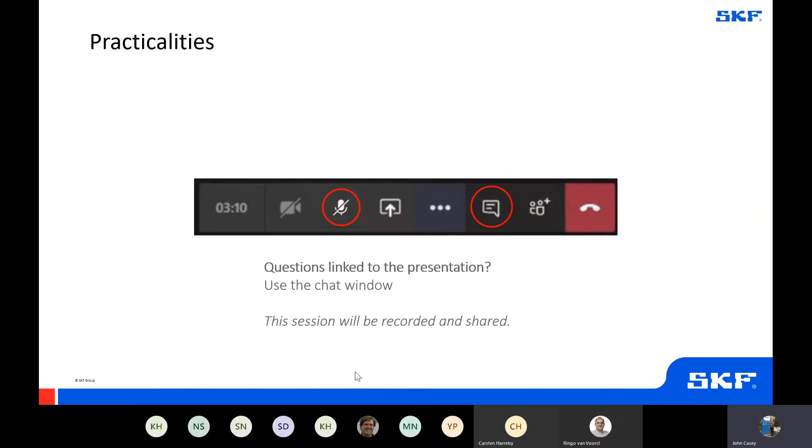SKF's business and strategy is based on a deep understanding of the trends and drivers that impact, or have the potential to impact, all markets, regions and industries in which the group operates. For more information on SKF's regions and industries, you can see our annual report. If we look at where our environmental challenges are, SKF are positioned at the forefront of trying to meet these challenges.

SKF's strategy is the foundation from which the group works towards its vision of a world of reliable rotation, and its mission of becoming the undisputed leader in the bearing business. Sustainability is embedded in SKF's business.

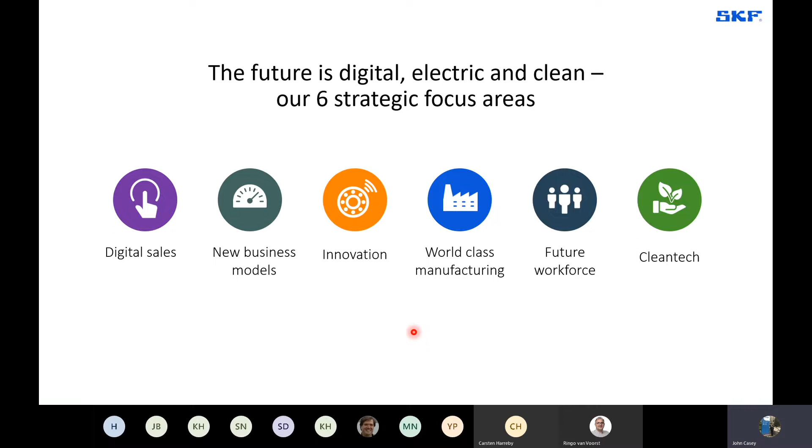Clean technology, in short clean tech, is any process, product or service that reduces negative environmental impacts through significant energy efficiency improvements, sustainable use of resources, or environmental protection activities. So we look at remanufacturing as being part of our strategic focus areas.

In 2019, we would have used 1.7 times more resources from the planet than nature could renew in the whole year. And the development goals are looking for us to change our methods of manufacturing.

For the circular economy, in nature nothing goes to waste. Everything is food for something else. It is called the ecological cycle of life. A technical cycle can be the same. This is called the circular economy.

The core idea is to keep the same materials in the loop and avoid the use of virgin natural resources. There are three principles of the circular economy. These are:

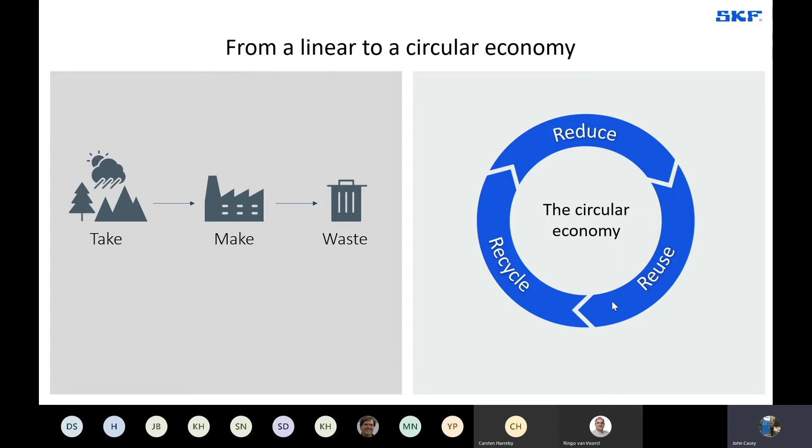One essential benefit of remanufacturing is that already processed material is used for a longer time. For example, a bearing that is normally replaced after 3 years could be remanufactured twice and last up to 9 years, providing the function of 3 new bearings.

The remanufactured bearings and units from SKF function as new and are delivered to customers with the same warranty as new bearings. For the customer, this brings benefits such as reduced lead times, lean operations, and often lower costs.

The remanufactured bearings cut emissions in the production phase by up to 90% compared with a new bearing.

Remanufacturing means rebuilding a product to the specifications of the original product using a combination of reused, repaired, and new parts. Remanufacturing is found in many SKF business models, often in combination with condition monitoring and predictive maintenance, but increasingly also as a standalone product.

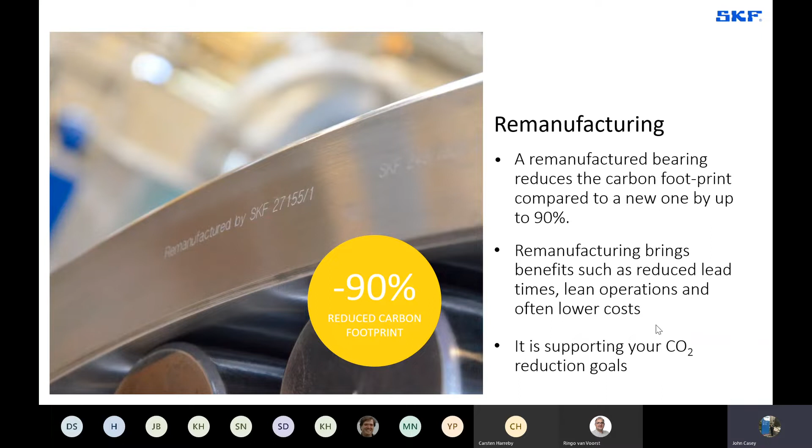As an example, flying Frankfurt to Madrid and back 3.5 times is the same as manufacturing a spherical roller bearing from new, as is eating 33 kilos of beef, or driving a new car 8,400 kilometers.

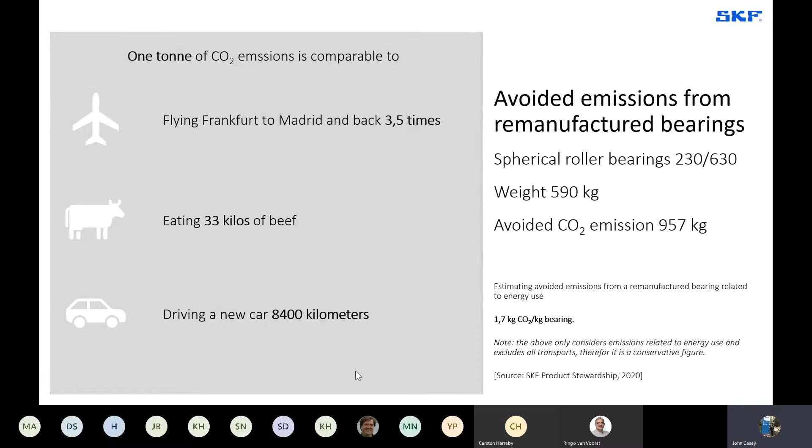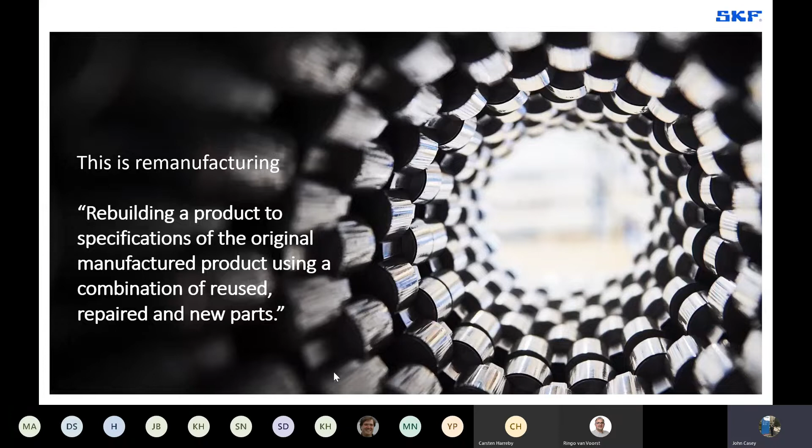As I've said, this is remanufacturing: rebuilding a product to the specifications of the original manufactured product using a combination of reused, repaired and new parts — the important point of remanufacturing.

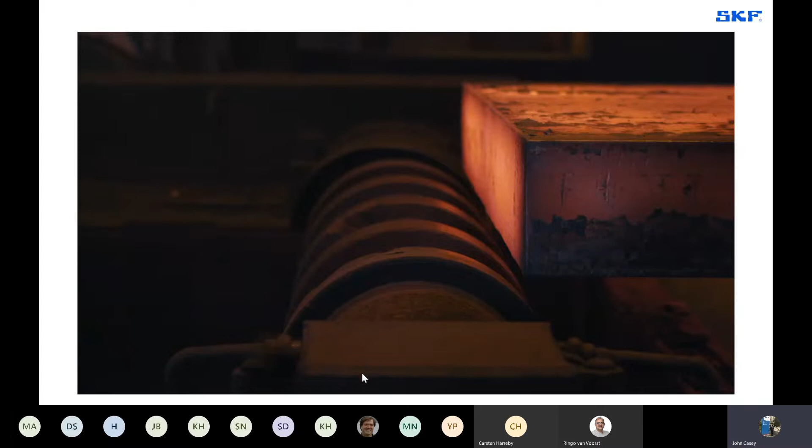I think it speaks for itself, the benefits of remanufacturing. But to be able to remanufacture, you need to do it the right way.

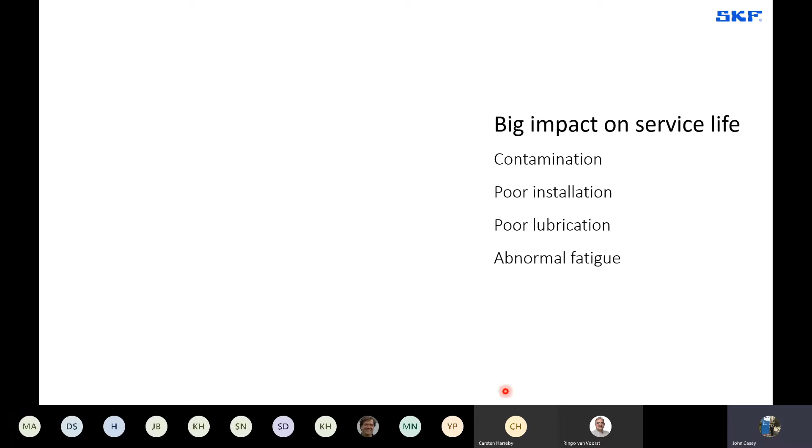There is a big impact on service life from environmental conditions, contamination, poor installation, and poor lubrication, all of which cause abnormal fatigue. If we look at a typical bearing life graph...

We can, given the right capture points, increase a bearing's life three times. If you capture the bearing at the right point, it's enabled to be remanufactured. If you let it carry on to the end of its life, it won't be able to be remanufactured. Capture at the proper point, and you can remanufacture again. This can be done twice, increasing the bearing life by three times.

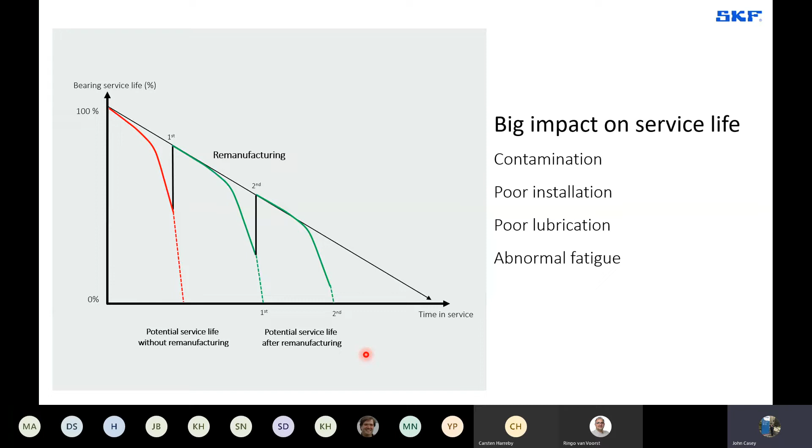But what's all important is where you capture these points of fatigue in the bearing. So for instance, if you look at this graph, early detection is crucial.

A customer in Sweden had over 700 connected lubrication points and condition monitoring points, linked to our SKF cloud through a remote connection to a monitoring center in Gothenburg. The reduction of unplanned stops improved sustainability performance.

As they were caught at this point using SKF condition monitoring, we were more able to remanufacture at a lower cost. If you capture the bearing at the listen-and-feel point, it's less likely to be remanufacturable, and it's going to be more expensive if it can be remanufactured.

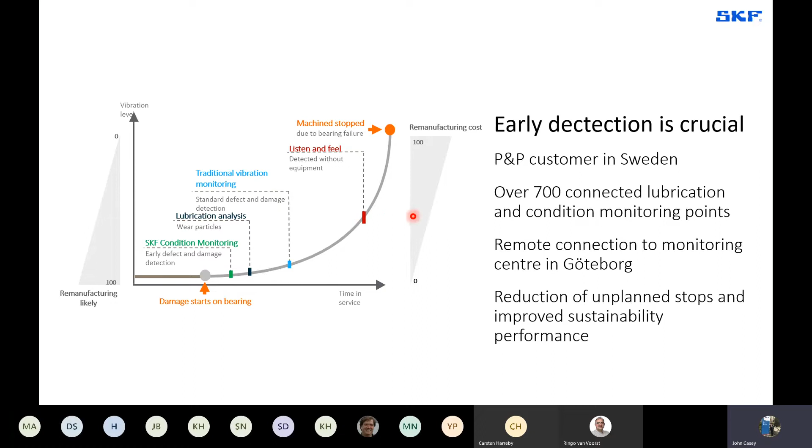As an example, digital transformation affects all parts of the value chain, from digital twins in design and manufacturing, to integrated planning, purchasing and customer use, to maintenance and condition monitoring. It also changes the way companies go to market.

Further, the cost to improve performance is drastically reduced by digitalization. We can detect defects before they cause damage and take preventative action by installing sensors, SKF's condition monitoring, and automated lubricating systems.

At the same time, we learn more about why assets fail, and we use that knowledge when we develop the next generation of products and services. Today, we monitor millions of customers' bearings, a number that will grow exponentially over the years to come.

This is another good point about remanufacturing. We can understand what's going wrong with the machine, and we can understand how to improve that by aligning properly, by using more lubrication, by using better lubrication, by using different clearances.

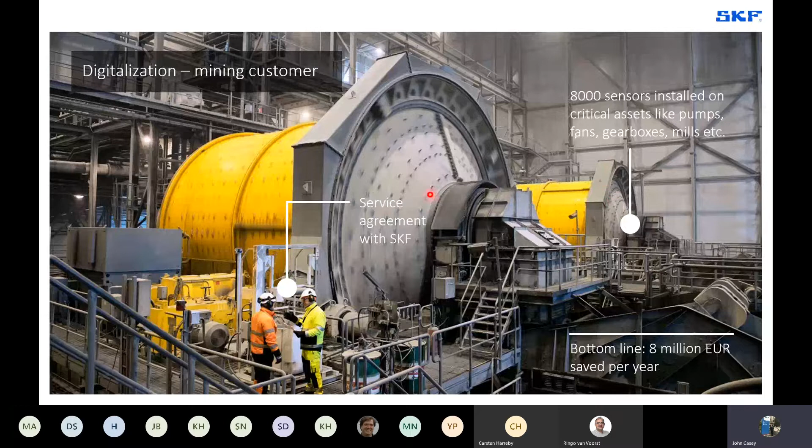If you have a look at this digitalization at a mining customer, we had 8,000 sensors installed, and this was done on a service agreement with SKF, making it much more affordable.

This is an example of a large-sized bearing which had been received in Steyr for remanufacturing. You'll notice on the rolling element that there was a crack. On the outer edge of the outer face there was fretting, and there were screw marks inside the inner face.

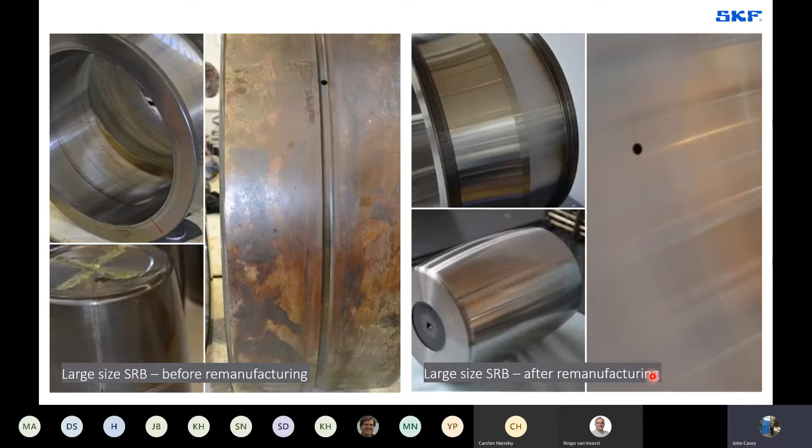We remanufactured this bearing using oversized rolling elements, manufactured from new at Steyr, grinding and polishing of the inner race, and introducing new load points. This was remanufactured and was able to go into use with a year's warranty.

This is a large size bearing after remanufacturing, and on this bearing we've introduced a new coating, black oxidization, which helps the bearing strength and helps the bearing last longer in service.

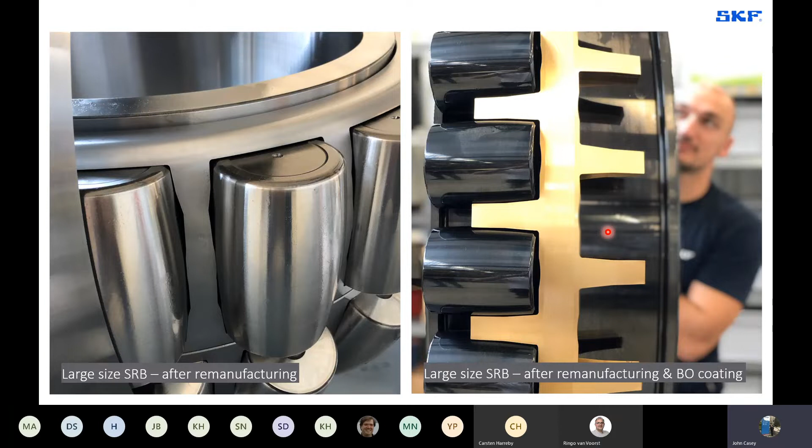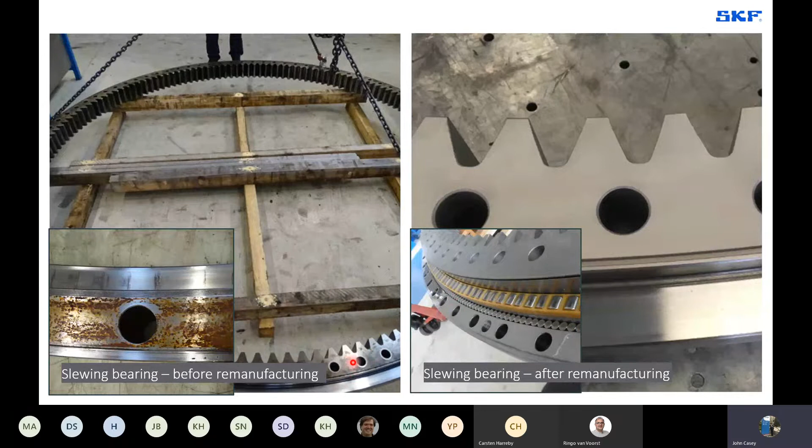We can also remanufacture slewing bearings. These can be done up to a size of 4 meters at Steyr, and for bigger sizes they can be done in other factories. With the slewing ring, we look at the bearing faces, and we don't go much into the gear end of the slewing rings.

Caster bearings are a big part of our business with steelworks. A caster bearing has a smaller diameter than a usual remanufactured bearing, but we do these in larger quantities, and there are various business models we can use to make it more beneficial to the customer.

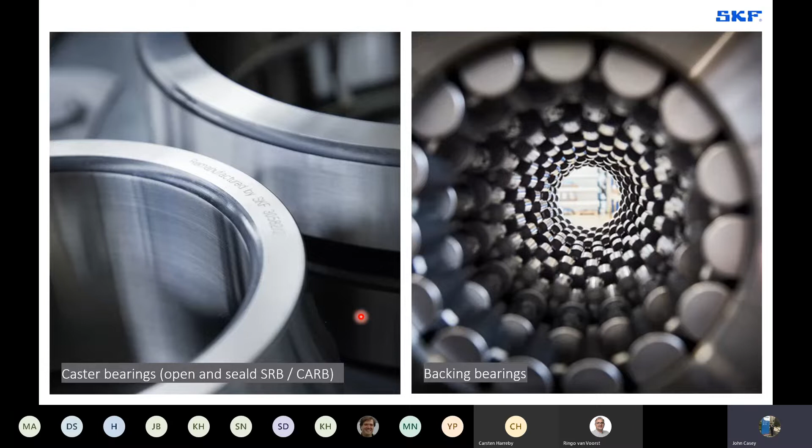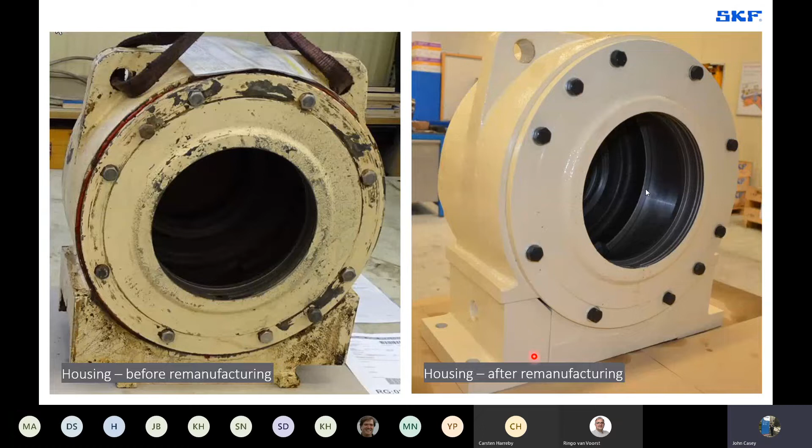The process of remanufacturing is quite typical, and it's a tried and tested method. We look at the bearing at the customer's site and agree that there could be a remanufacturing capability. This is then sent to Steyr, where the bearing is analysed, there's cleaning and inspection, and documentation at that point.

There's a quotation then issued to the customer where the customer makes a decision if they want to proceed with the remanufacturing of the bearing. And then the remanufacturing takes place with the remanufacture of the components, high quality checks, assembly, preservation, packaging, shipping.

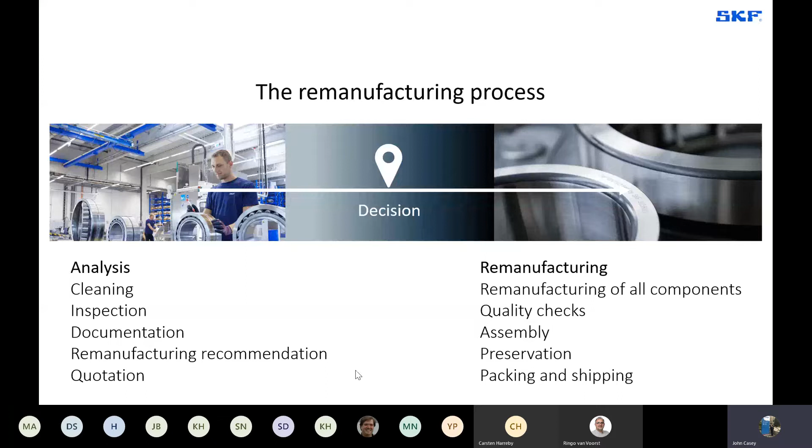We also supply the documentation that we found from the bearing report. We will send that off with the remanufacturing report. There are 3 service levels of remanufacturing that we work to in the remanufacturing process.

The simplest and cheapest method would be service level 2, and this is where a bearing has been on a shelf for a long period of time, where it's over its use by date, and we would then check it out, clean it, re-lubricate it, pack it, mark it that it's been remanufactured, and give it a new warranty and send it back to the customer.

Service level 3 is where the bearing has been in use but it's been caught at probably the optimum point, where we just need to do some polishing, re-lubrication, repack it.

Service level 4 is the high end of the remanufacturing process, where we would need to do some grinding and polishing and some new components like oversized rolling elements. This would then be relubricated, marked that it's been remanufactured, and packed off.

We do also have the facility of emergency repair, so this will bridge the time until a new bearing is available. If a bearing that is required is on a long warranty, on a long delivery, then we can remanufacture a bearing. This would have no warranty, but we would also be able to supply an analysis report.

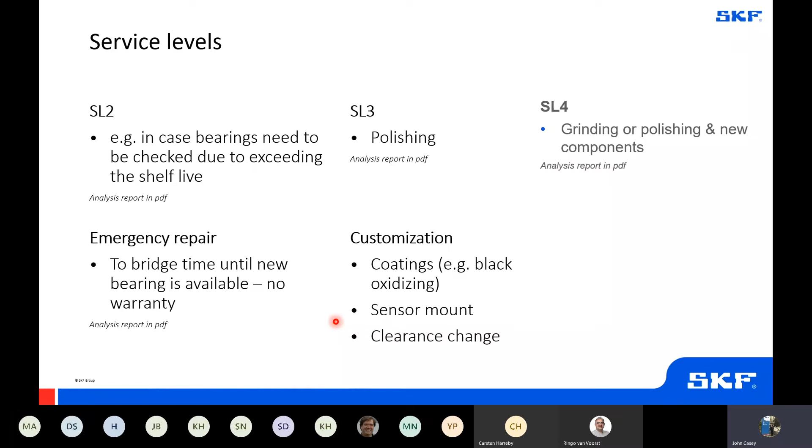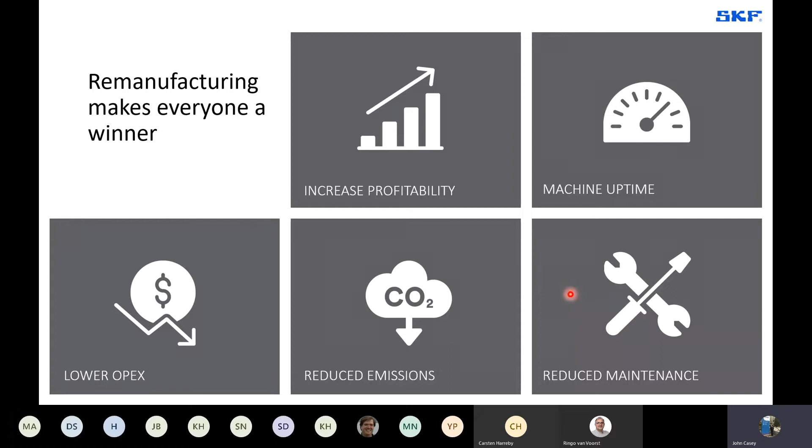Remanufacturing will increase profitability because you're using the one bearing a number of times if you catch it at the right point. This will give you more machine uptime, will lower operation expenditure by improving bearing life, and will reduce emissions by not supplying a new bearing all the time. This will result in reduced maintenance because, using all the facilities that we have, we can give an indication of what needs to be improved on the machine and the fitting of the bearing.

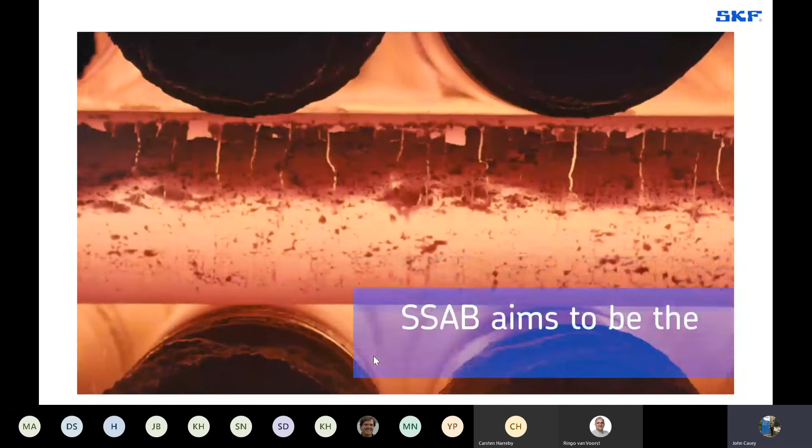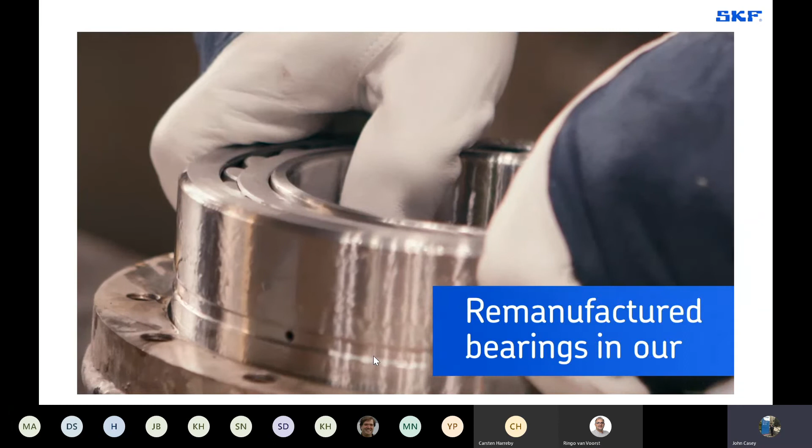Hi, my name is Pekka Virsihemo, Central Workshop Manager here at SSAB Raahe in Finland. SSAB aims to be the safest steel company in the world. Our vision is to contribute to a stronger, lighter and more sustainable world. Remanufactured bearings are one good example to support our vision and principles. SSAB uses remanufactured bearings in our steel machinery, reducing maintenance, energy, waste and cost. With this example, we take responsibility to improve and contribute to a better world. Thank you.

That video was important because of the work we carry out in steelworks with caster bearings. Now, with the caster bearing, they are used on an hourly rate, so you could have a bearing in for 1,000 hours before it could be changed. These bearings are then generally scrapped.

So what we do with a caster bearing is take a quantity of bearings and have a service ratio, where we look at taking 100 bearings, for example, and saying that 80% of those bearings will be remanufacturable. We can then give you a business model where we have a unit price for a remanufactured bearing and a brand new bearing, giving back 100% of the bearings, though maybe only 80% of them have been remanufactured.

This enables us to keep the benefits of being able to monitor caster machines and improve the way that the caster machines operate during their service. So we can, for instance, introduce new lubrication systems, introduce better lubrication, look at sealing bearings, and look at the impact of alignment of operations.

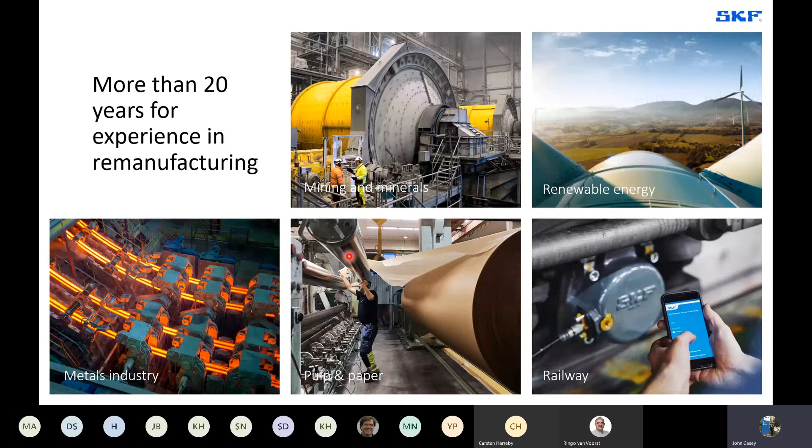We have more than 20 years experience in remanufacturing. We have quite a lean team of engineers and technicians remanufacturing bearings globally, and these are all done with state-of-the-art machinery. We've invested significant sums of money into our factories. We have 13 industrial bearing remanufacturing centres globally, and the one we've been talking about today is Steyr in Austria.

So, to join the circular movement, we're looking at remanufacturing industrial bearings, RecondOil, introducing better lubrication systems. We have a massive program of railway bearings currently running in many parts of Europe, and these have been tried and tested over the years. SKF combines hands-on experience in over 40 industries with a vast product portfolio and knowledge across the SKF technology platforms - bearings and units, seals, lubrication systems, condition monitoring equipment and services.

We have the potential of really getting on board with remanufacturing. At the moment we're quite low on this potential. If everyone works together, we can look at remanufacturing on a much higher level with everybody's help.

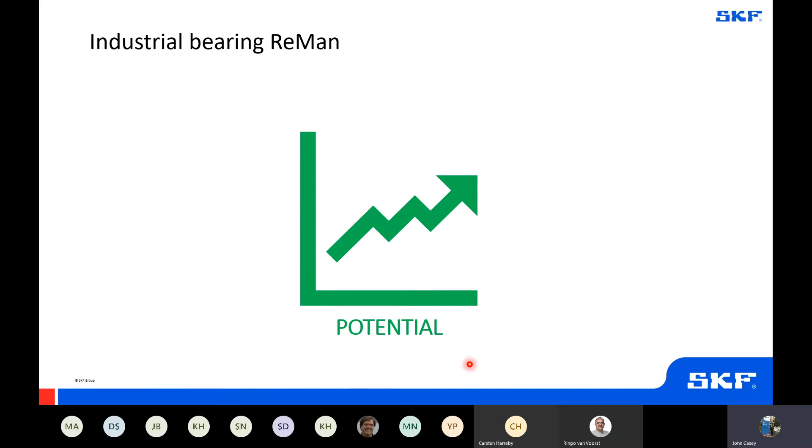We've only really touched on the subject of remanufacturing today, but hopefully it will lead to a further discussion. There are many aspects and things we could go into, but the presentation would take a long time. We've hopefully given you an insight and a taste as to what remanufacturing can do for us all globally. I'll take any questions if there are any, Ringo.

Yes, hi John. Thank you so far. We have some quite interesting questions in the chat box, and the first one is already answered, I think. Is there any remanufacturing center in the Middle East? I think the answer is no. No, you're right. Do you know if there are any plans to develop one? Well, given SKF is always looking for innovation, I think it would be something being considered, but I don't know if there are any plans at the moment. I wouldn't be surprised. Okay, I hope this question is answered as good as possible for the moment.